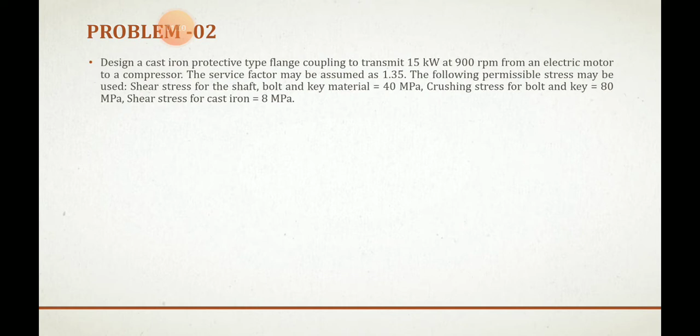The following permissible stresses may be used. Shear stress for the shaft, bolt and key material is 40 MPa, that is megapascal. Crushing stress for the bolt and key is 80 megapascal, and shear stress for the cast iron is 8 megapascal. Okay, so let us begin with the solution of the problem.

As I'm telling you in every problem, the first thing you have to do is figure out what is given in the problem and what you need to calculate with the help of this given data. So P is 15 kilowatt, that is the power. N is the speed in rpm. Service factor is 1.35. Tau s and tau b, that is shear stress for the shaft and bolt, is given as 40 MPa. Then sigma cb, that is the crushing stress for the bolt and key, is given as 80 megapascal. Tau c is given as 8 megapascal, that is for cast iron, in Newton per mm square. And we have to design a protective type of flange coupling.

Now first we have to design a hub. I told you what hub means. Hub is a portion where we are going to fit the shaft. First we have to calculate the torque, that is T equals P into 60 divided by 2 pi N. So P is the 15 kilowatt given in the problem, 60 is as it is, 2 pi into N, where N is the speed in rpm. So what you will get is 159.13 Newton meter.

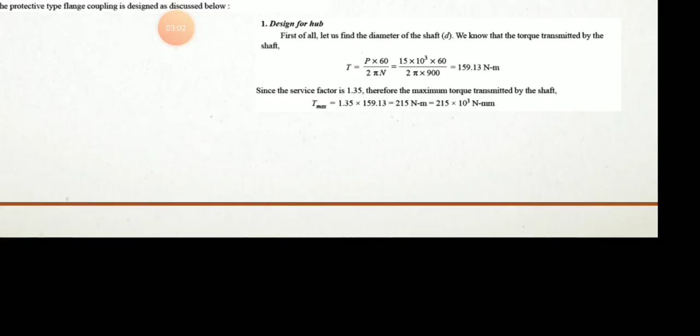But this is not your actual torque, because they have mentioned the service factor. So you have to multiply the service factor to obtain the maximum torque. It is nothing but 1.35 into the mean torque we obtained, that is 159.13. So you will get 215 Newton meter, or 215 into 10 raised to 3 Newton mm. So you have to convert it into Newton mm.

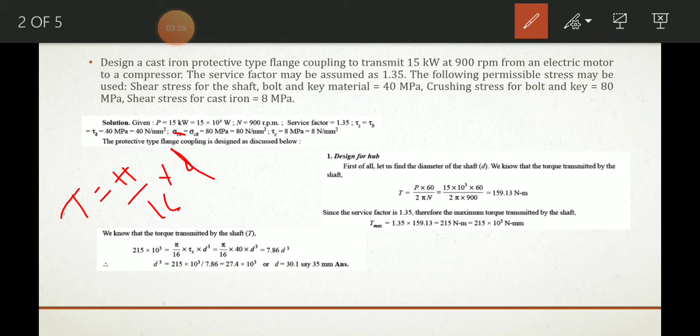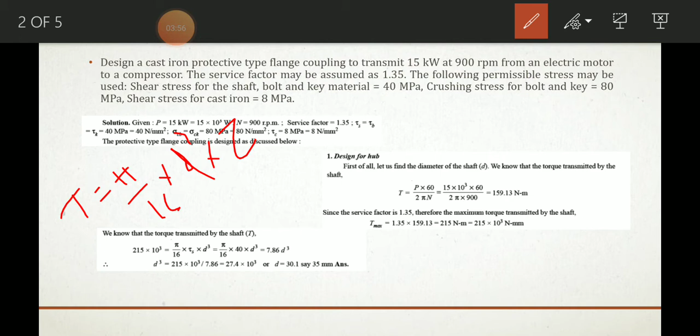Next you have to calculate the diameter of the shaft. The formula for that is T equals pi by 16 into d cube into tau. This is the formula to calculate the diameter of the shaft. All the values are already given in the problem, the only unknown is the diameter, that is d. So d is 30.1. One important thing is that whatever diameter you get may not be a standard one. You have to go to the data handbook, to the table where the standard diameters of shafts are mentioned, and pick from that. So here 35 mm is the suitable diameter for the shaft.

We'll move to the next. Now we already got the diameter d, so from that we can calculate the outer diameter of the hub, that is 2 times small d. So d is 35, that is 70 mm will be the outside diameter of the hub, and the length of the hub is 1.5 times small d, so it is 52.5 mm.

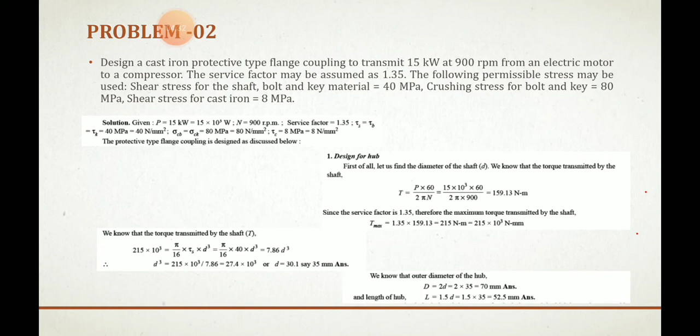Okay, next we have to check for the cast iron. So this is the formula T equal to pi by 16 into tau into capital D raised to 4 minus small d raised to 4, divided by capital D.

Here we have to check for the tau c, and it has to be less than what is given in the problem. Then only can we say whatever we are doing is going good. When you simplify it, you will get tau c as 3.4 Newton per mm square, which is less than the 8 megapascal given in the problem.

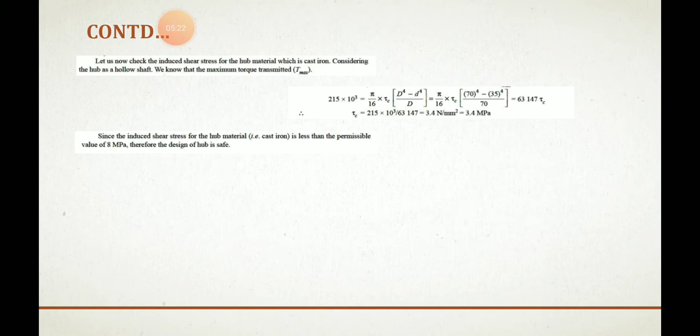Since the induced shear stress in the hub material, that is the cast iron, is less than the permissible 8 megapascal given, and whatever we obtained is 3.4 which is less, we can conclude that the design is safe.

Next we go for the design of the key. As I told you in the previous problem, before going to the design of the key, you have to calculate or find out the dimensions of the key, which you obtain with the help of the diameter of the shaft.

You have to go to the table, and corresponding to the diameter, there are the corresponding length and width of the key. Now for diameter equal to 35 mm, you will have width 12 mm and thickness 12 mm. Width and thickness are the same since we are assuming it is a square key.

Next we have to check for the shear stress for the key. The formula is T equal to, where T is 215 into 10 raised to 3 which was already found out, equals L into W into tau K, which is the shear stress for the key, into D by 2, where D is the diameter of the shaft.

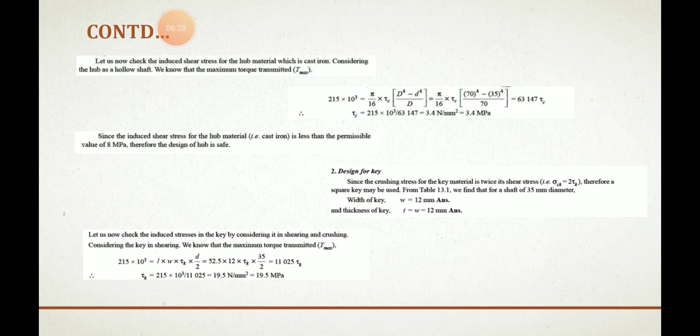So at the end, the value which you get is 19.5 megapascal, and we see that this value is less than the permissible shear stress.

Next we go for the crushing stress in the key. The formula is T equal to L into T by 2 into sigma Ck, where sigma Ck is the crushing stress for the key, into D by 2.

The value you will get is 39 megapascal, which is also less than the permissible crushing stress.

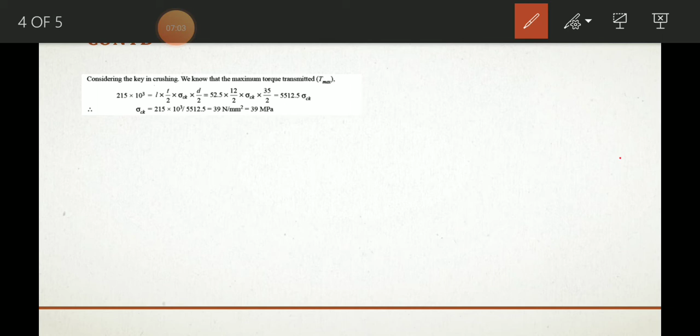Next we'll go for the design of the flange. The thickness of the flange, TF, equals 0.5 times D, where D is the small d, the diameter of the shaft, which is 35. So 17.5 mm is the thickness of the flange.

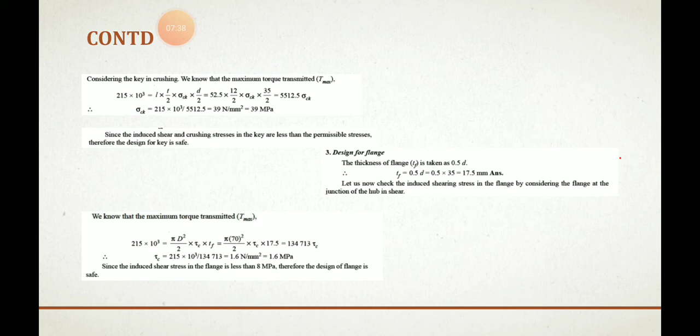Next, the maximum torque transmitted, T equal to pi by 2 d square into tau c into TF, where TF is the thickness of the flange, tau c is the shear stress in crushing, and D is the outside diameter of the hub. The value you will get is 1 point...

So tau you have to find out here, and since this is less than the permissible value, we can conclude that the design is quite safe.

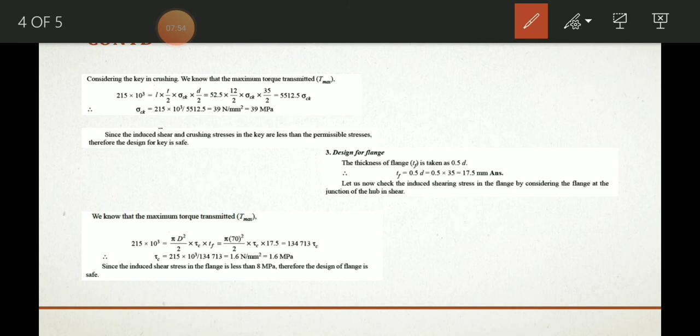Now design of the bolt. D1 is... we have to design the bolt. When you design the bolt, you have to first calculate the number of bolts you are going to use for the design. So N equals 3, which is the number of bolts depending upon the diameter.

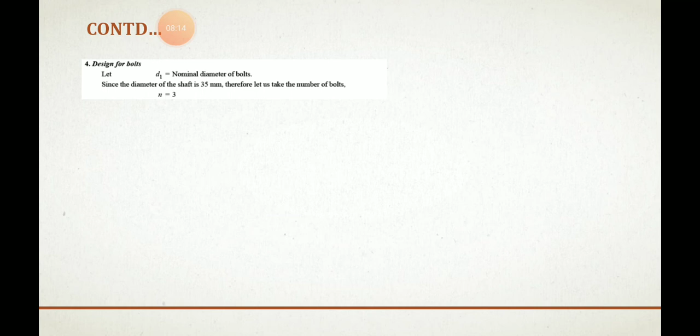So D1, the pitch circle diameter, capital D1, equals 3 times D, that is 105 mm. Next you have to calculate the nominal diameter d1, which equals 6.6 mm.

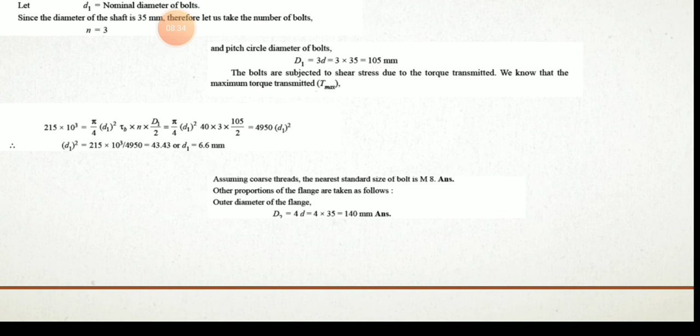Next, assuming coarse thread - there are two types of thread, coarse thread and fine thread - so we design for the coarse thread. The nearest standard diameter of the bolt is M8.

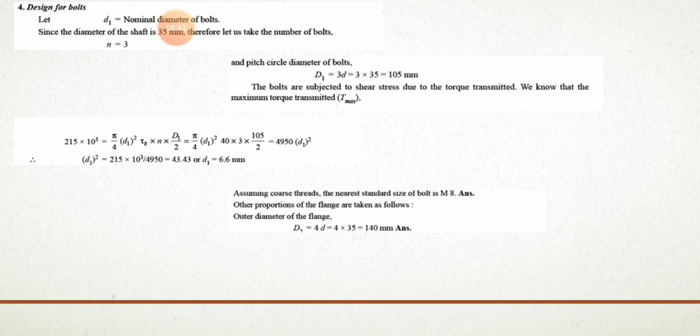M is metric. Other proportions of the flange are taken below. So D2 is 4 times D, that is 4 into 35, that is 140 mm.

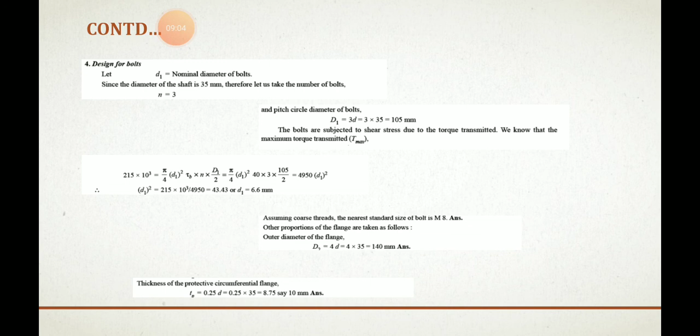And the thickness of the protective flange coupling tp equals 0.25 times D, which equals 8.75, or you can round it up to 10 mm. Thank you.